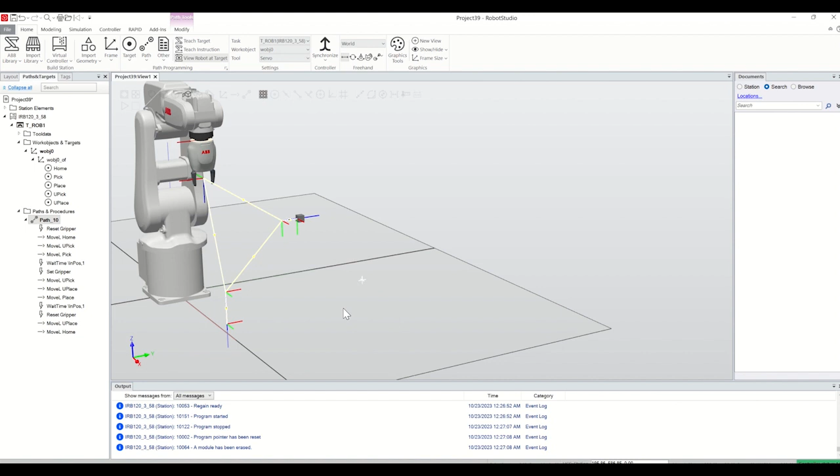It will go to pick position, then back to upper of pick position. It will go closer to place position, place it, come back to closer to place position, and then go back to home. So let's start modeling the whole sequence now.

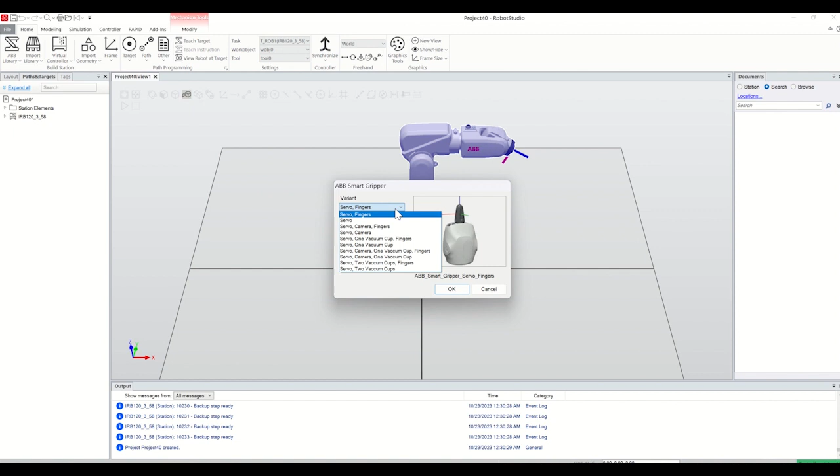To do this, first I am going to select IRB 120, the most common robot, and we already have one in our lab. So we got it, and then I want to take the smart gripper from the import library. I'm not going to use the camera, fingers, or other things, except just servo and fingers.

And under the layout, we need to go there and say yes. So we basically got the gripper in front of the robot.

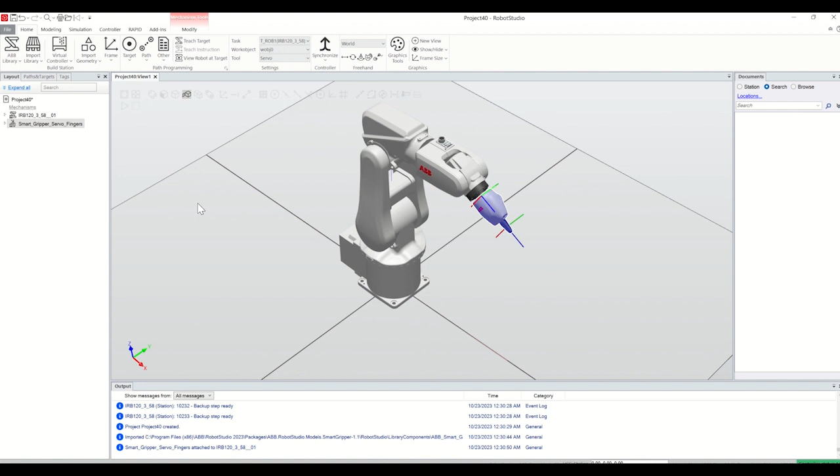Now let's see a couple of things we need to do here. We need to double click on the robot and modify mechanism joint jog. I usually do this one 90 degrees and that one 90. Yes, so that is the sequence we got.

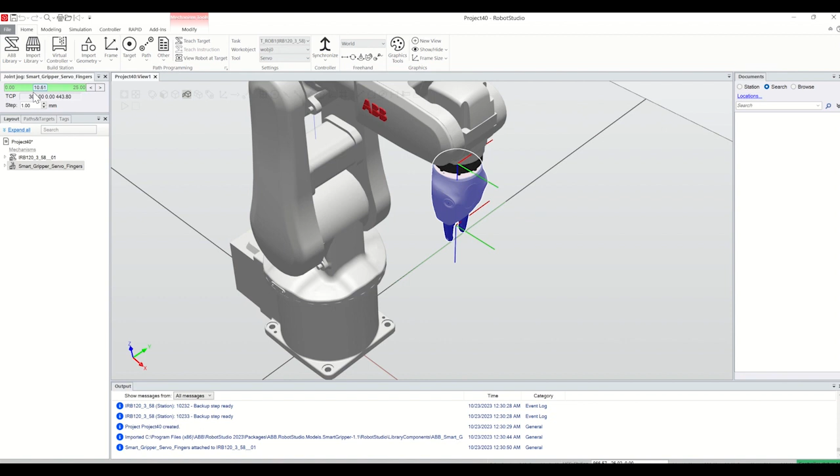We also want to go, because we are under the mechanism jog. If you go there, you can see that's how you can manually open and close the gripper. So I can close it, and I can go back again and modify the mechanism.

So here we have sync position and home position. Right now both of them are zero because the value is zero. If you double click on home, I can make it 25. You will see the value updated here.

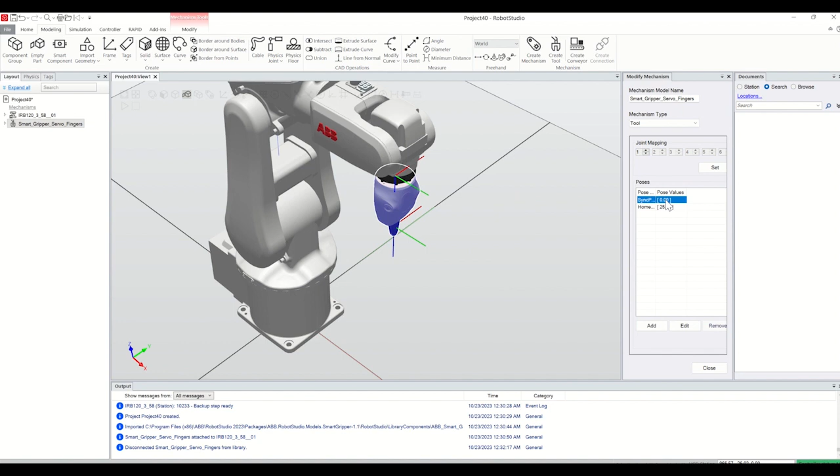I would need to do the same thing for sync position, but I know I will get this cross sign because I didn't disconnect it from the library. So I would need to go there, right click, and disconnect the library, and then it will allow me to put some value.

So maybe I'm putting the value 10 here, and I can close at this point. So I got this piece.

Now the next thing is I would need to make some object here. So let's make an object first. I would need to go to solid box, and the corner I'm going to make is 400, 0, 0, and the length should be 20, 20, 20.

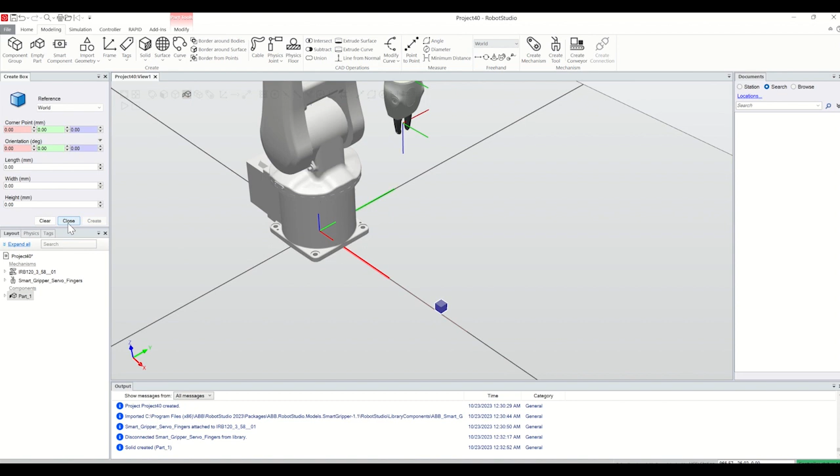So I got one object here, and I want to make another object for the destination. I want to put it at maybe 300. I think that one should be 400 maybe, and this is 300 and 300. Basically, I want to have some elevation and the orientation.

Basically, I want to make it 90 degrees with respect to the x-axis. So let's make the orientation, or we can make that orientation during the making of the target.

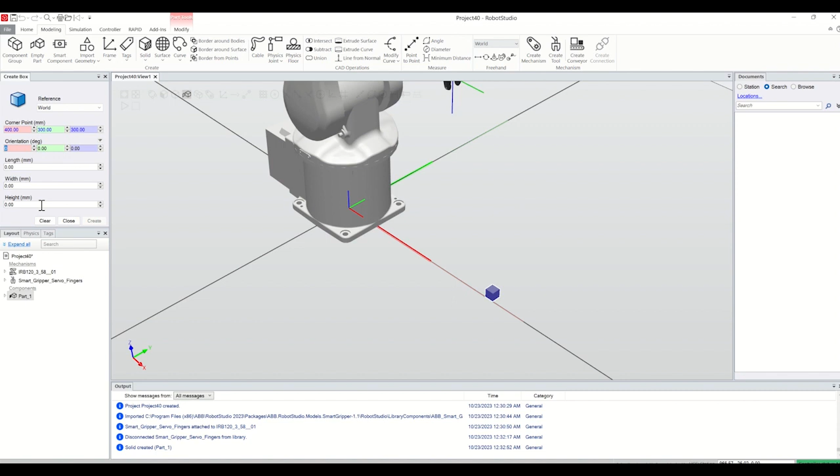So right now let's make it 20 by 20 by 20 for this one, and I can create one of the objects, right? So I got them.

Now close it, and I would need to make a couple of targets here, because before doing any kind of events and actions for the smart gripper, I want to make the toolpath and see if that toolpath works for the movement I'm basically targeting for.

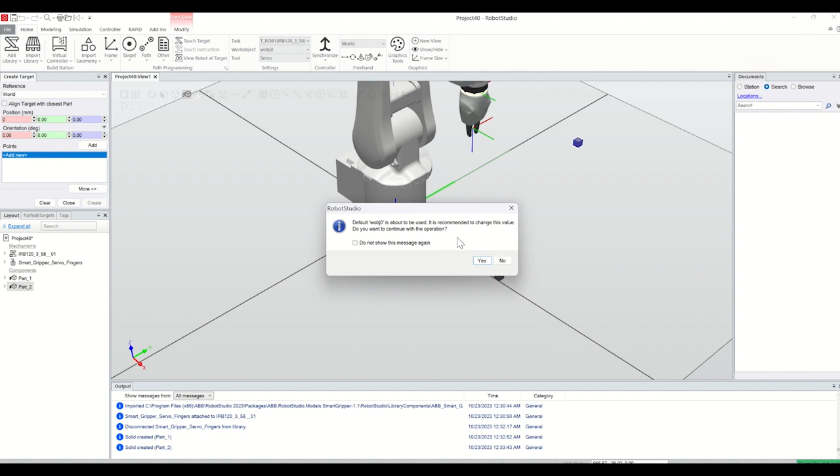So let's make the first one. Under the home position, I want to make a target, and I want to make a target exactly at the TCP. So I can just click teach target, and then I can say yes.

So if you go under the path and targets and expand this one, you will see target 10 is there. I want to make another target on top of this one, making sure I'm just selecting the position, and since I want to use the center, I'm snapping the object and need to go back here and select this thing.

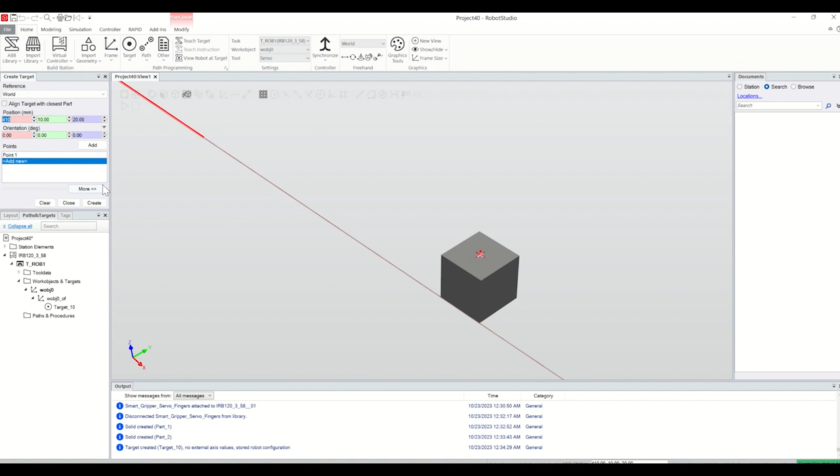That's how, you will see point one is here. And maybe I can make another one, that can be point two, and I click create. So that's how basically I got two targets, one is target 20 and target 30.

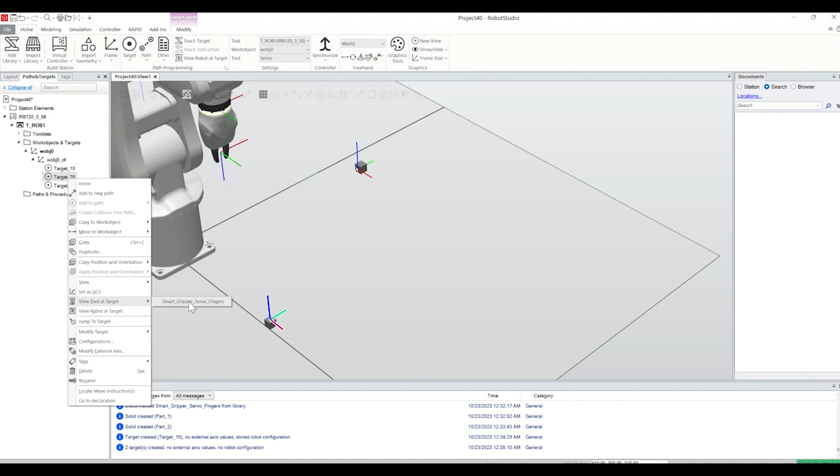As I mentioned, this tool will pick that object and make a 90-degree rotation with respect to X and put it here. But right now I'd need to change the target position of target 20, because if you see the z-axis of the tool and the z-axis of the target, they're opposite. So if you view tool at target, you'll see it is basically underneath. You don't want something like this, right?

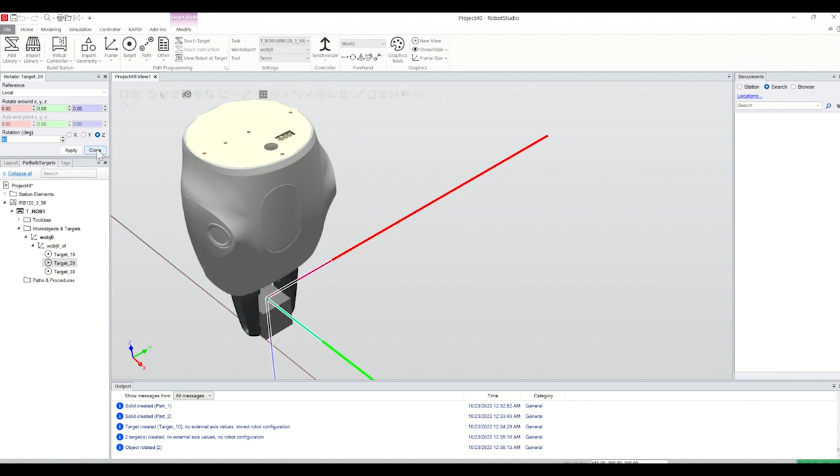So we would need to make the orientation maybe 180-degree with respect to the y-axis. That's how we got something like this, and maybe 90-degree with respect to z, because I want to see it from the front side. So that's the changes I did, and for another target, it is still like this. So let's do the first thing.

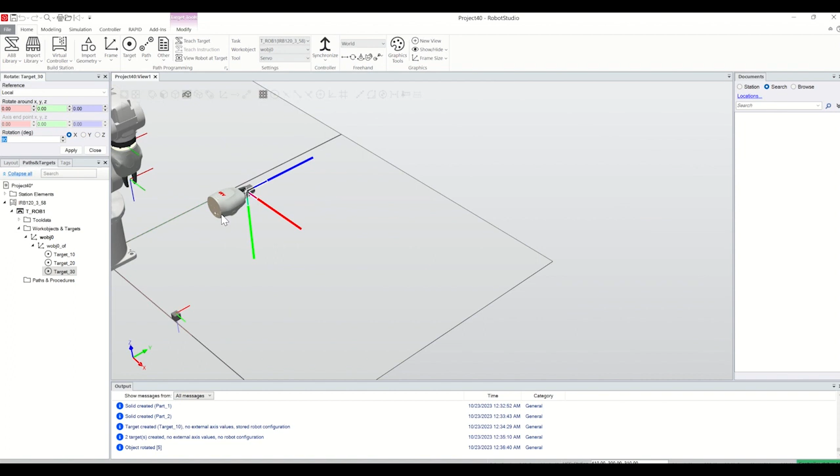I want to make it 90-degree with respect to x. So I'm going to go to rotation, and just 90-degree with respect to x, and let's see how it looks like now. Maybe I want to make something like this. Yes, so I want to close it.

So if you right click and see view robot at target, then if you click them, the robot will basically go there, and it is reaching, which is good.

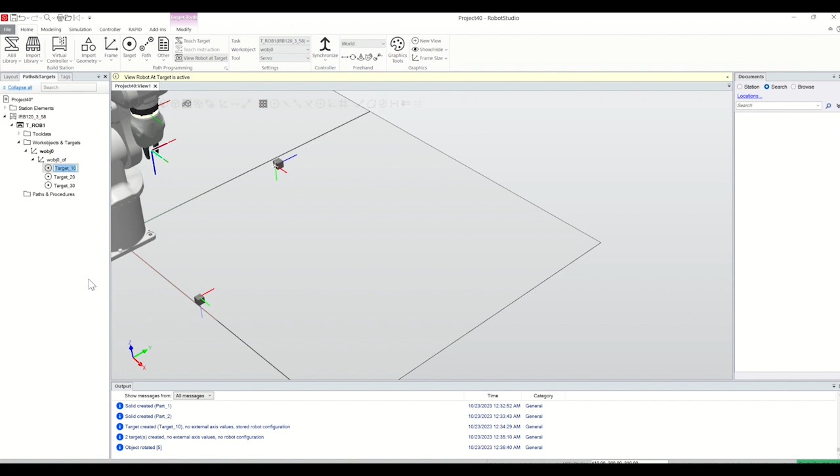So we got three targets, but we want to make the tool path. Well, before doing it, let's rename them. Maybe this one is the home position, that one is the pick position, and the other one is the place position.

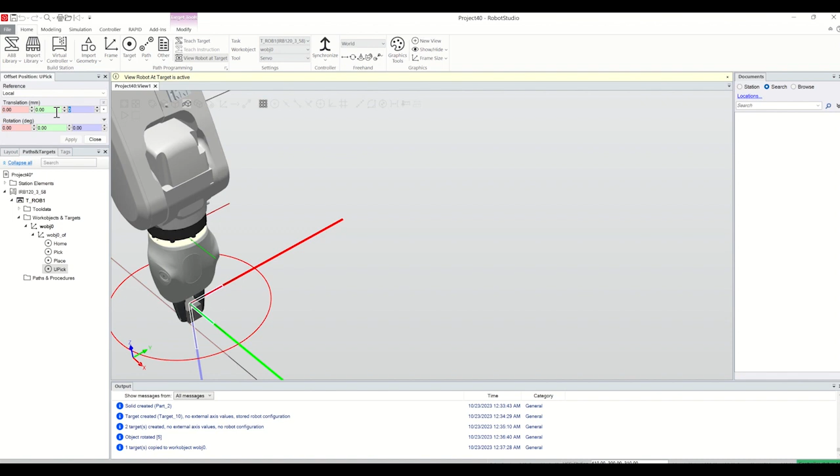We want to make a little upper or elevated position for the pick and place. So I want to do Control C V, and make an upper pick, and offset the z value, maybe negative 100. I usually do negative 100 for demonstration purposes, right?

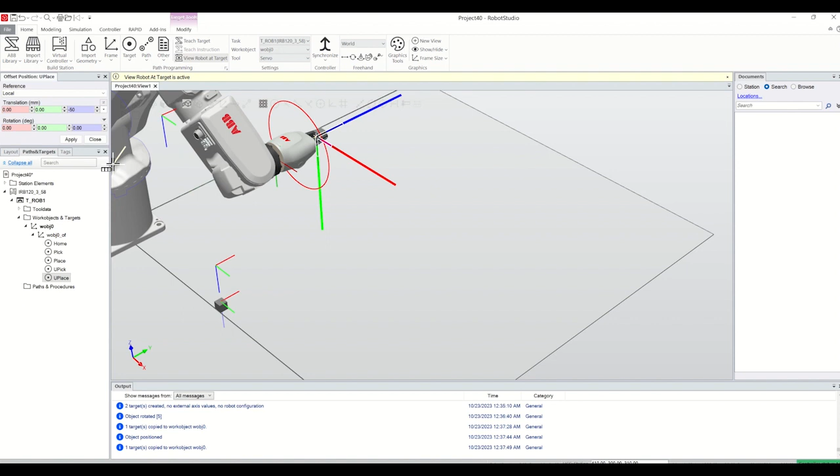And for the place, I want to first of all rename it 'upper place', and still I'd need to go and modify it. This time let's make it 50 - oh no, other side, maybe negative 50. Apply. Okay good, so now we can click it again: pick and upper pick, place and upper place.

Now let's send those points to the new tool path. I know right now it looks really messy, but we can put them side by side and make a nice arrangement, right? So first of all, we want the tool on top of the upper pick and then pick.

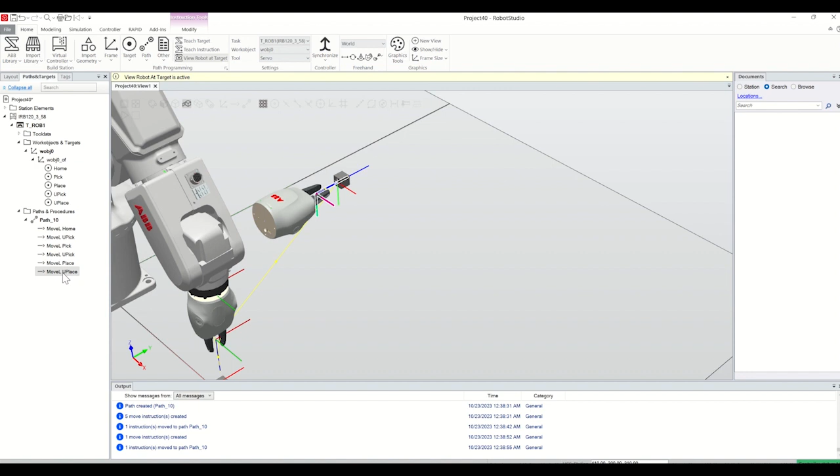Then maybe I can make one after picking it, it will go back again to the upper pick. Then it will go back to upper place, and it will place, and again go back to upper place, and finally go back to the home position. So I'm just targeting for a tool path like this, and before doing anything, I want to see if this one is moving.

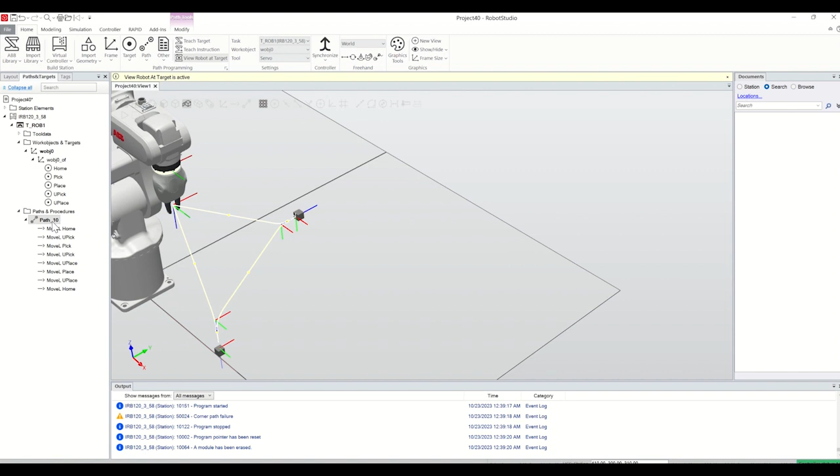Okay, yes. I know I didn't change any kind of speed, but I'm happy that whatever tool path I made is basically working. So let's change the speed now, right?

You can go there and select maybe 100 for now, and the zone should be fine because you are picking them - you don't want to lose any coordinate thing, right? So let's make it fine zone and 100 for now.

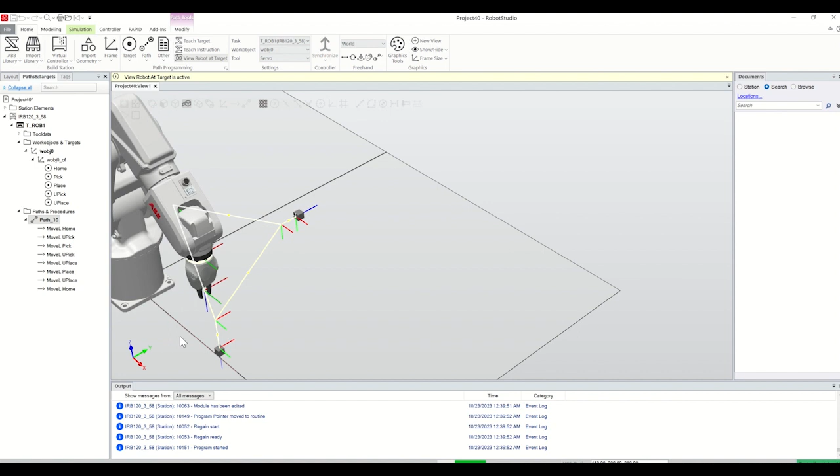And if you run it again, you'll see this time the robot is slower. It will go there - basically this is the thing I'm targeting for - and it will place there, and come back to the home position, right?

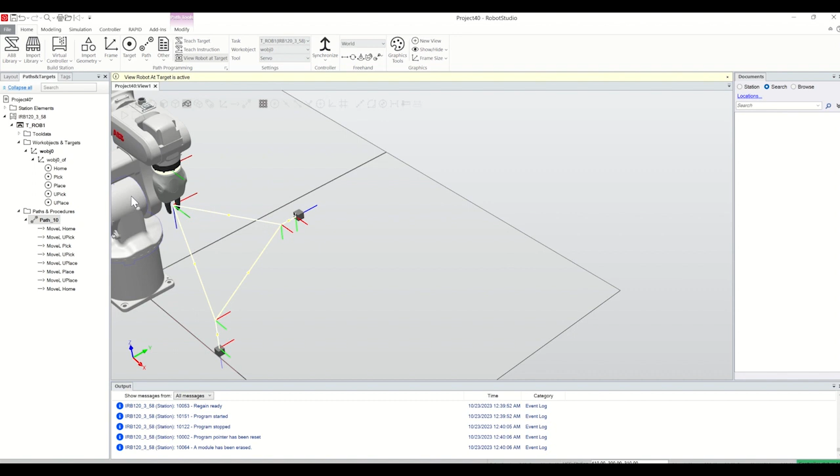So now the next step of this work is I would need to make the event for the gripper, and at the same time some actions related to those events. To do that, let's go back to home, and I want to go to the modify mechanism. I want to make it...

I want to make it 25 now. I want to make it open for now, right? Now I would need to go to the controller - I want to make a new signal for the gripper because I didn't make any signal for the gripper yet. So let's go there.

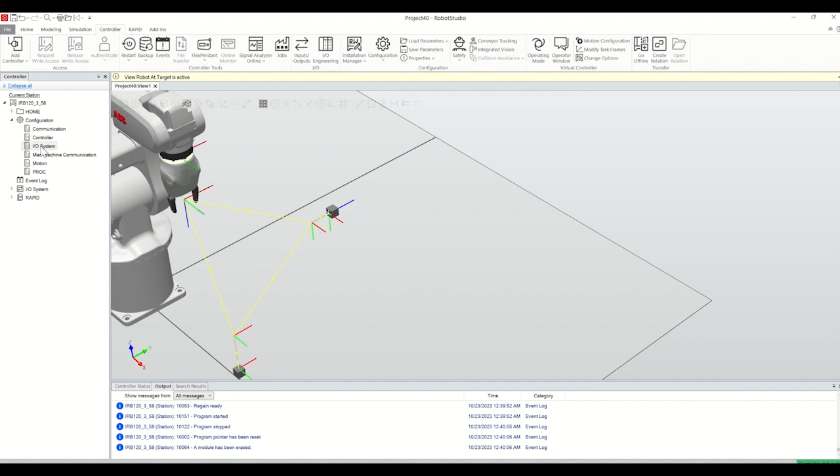Double click on the IO system, and right click on the signal to make a new signal, and let's name it gripper. This should be digital output, and let's make default to all.

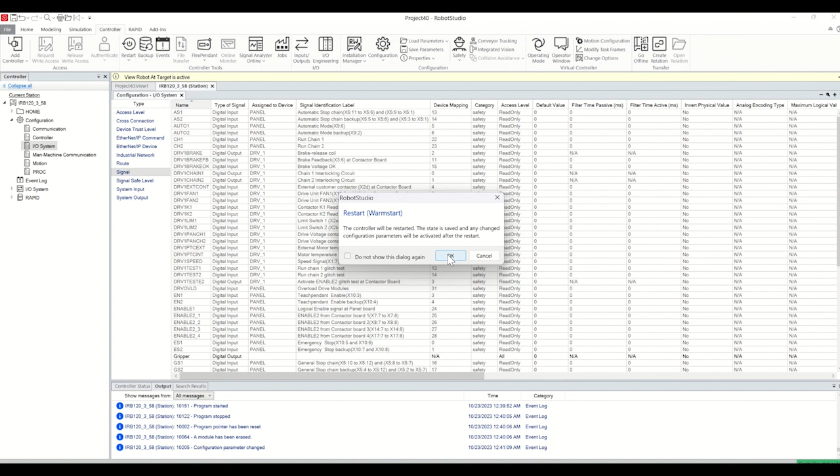I know the change will not take effect until the controller is restarted, so I would need to restart the controller. It can take a couple of seconds, but the good thing is you will see a bright color gripper here, and it is still working to make the controller online.

I'm pretty sure it will be done soon. Once the controller is online, after making a new signal from the controller, we need to go under simulation and configure, and then we need to add two events. The first event will be, let's see, first we need to see gripper is here, yes, gripper is here, and one signal is for picking and another signal is for placing.

So if you want to pick using the gripper, you need to make sure the gripper is basically gripping the object you want to pick, right? That's why the signal is true or one. And then set action type, maybe I need to go to move mechanism to position.

Then next, I am going to use the smart gripper, and my position is sync, because you remember the gap between sync was 10. So I'm just finishing it. So we got one event here.

I would need to make another event. This time, first of all, we need to make sure it's still selecting the gripper, but this time signal is false or zero. And the same thing, move mechanism to position.

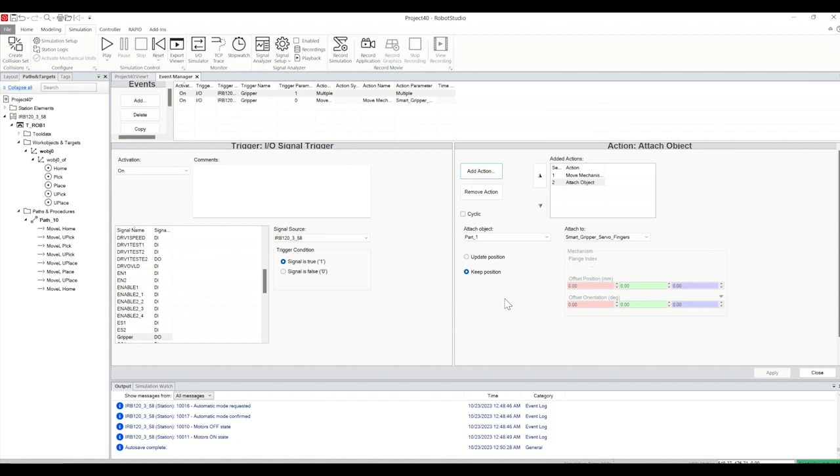So we got one for attach object, then you need to go to the second event where you need to create another action for detach. Here you are going to detach the same thing you attached, and then from the smart gripper. So we got both of the actions here.

Now the next step is we need to put them in a sequential way. So I'm using reset on top, then let's put the wait time and gripper after reaching the pick position, and I can do a control C-V for placing, and maybe a wait time, control C-V in front of placing it. So let's see if it really works.

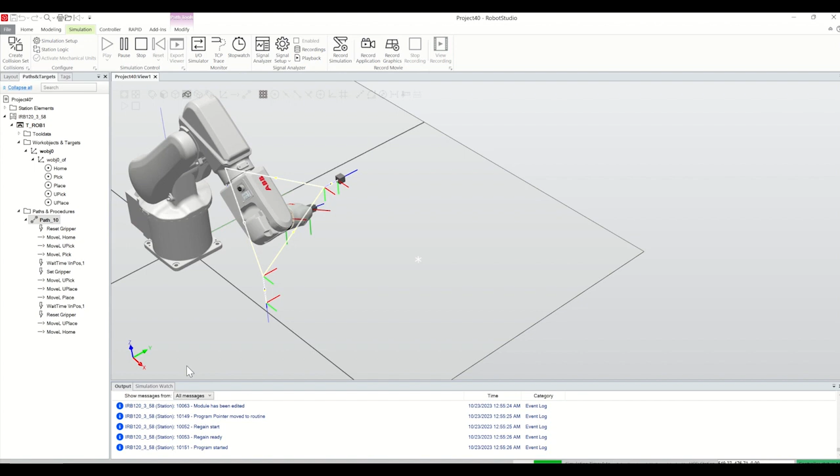So move along the path. Okay, so first of all, it is basically coming to the position. Yeah, it is picking, and it is trying to go back to the position I want to place it, and it will go back to the home position. So yeah, basically it is working.

I know I forgot to make part two invisible, so maybe I can just make it invisible for now, right? And maybe I can play one more time, and I will see the changes this time even more nicely.

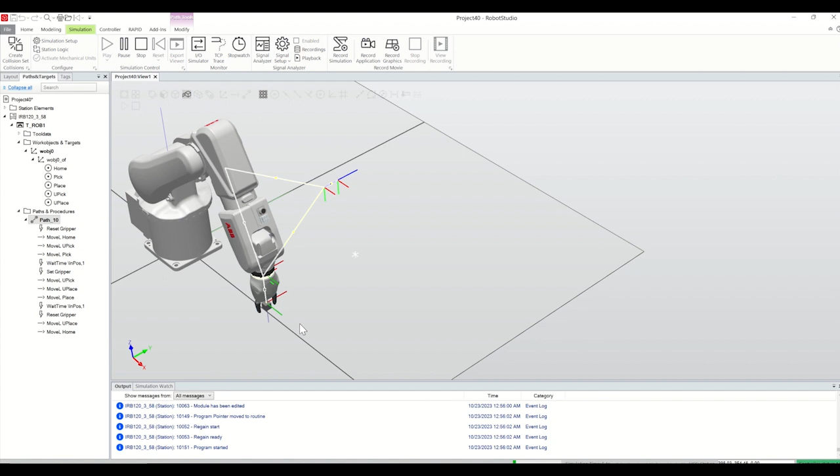So yeah, it is going for object one, and it is going to place it at an elevated position with some orientation, like 90 degrees with respect to X, and it basically went back to home. So yeah, that is another kind of instructions I tried to make for all of you. I hope that will help.